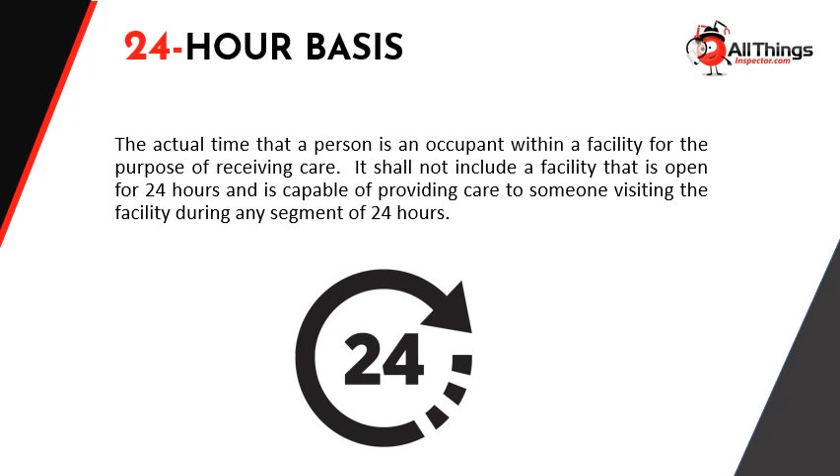24-hour basis: the actual time that a person is an occupant within a facility for the purpose of receiving care. It shall not include a facility that is open for 24 hours and is capable of providing care to someone visiting the facility during any segment of 24 hours.

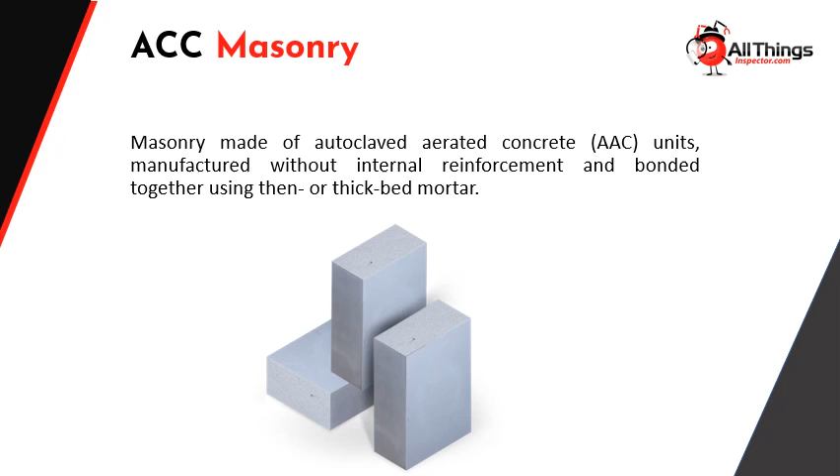ACC Masonry. Masonry made of autoclaved aerated concrete units, manufactured without internal reinforcement and bonded together using thin or thick bed mortar. Accessible. A site, building, facility, or portion thereof that complies with Chapter 11.

Accessible means of egress. A continuous and unobstructed way of egress travel from any accessible point in a building or facility to a public way.

Accessible unit. A dwelling unit or sleeping unit that complies with this code and the provisions for accessible units in ICC A117.1.

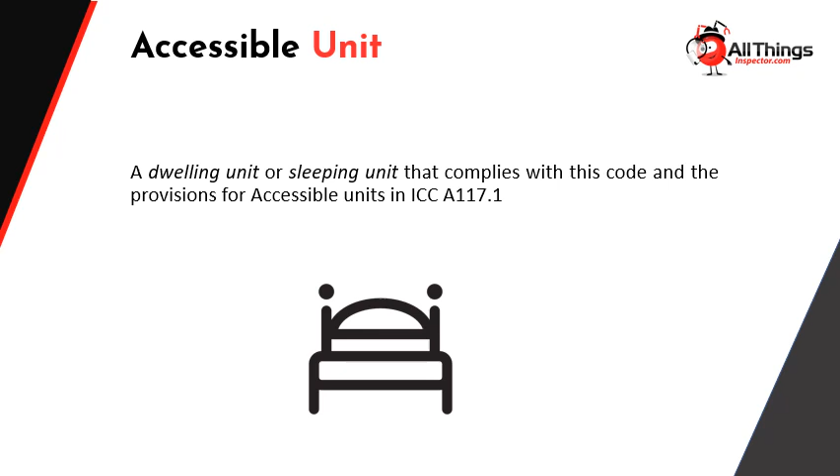Accreditation Body. An approved third-party organization that is independent of the grading and inspection agencies and the lumber mills, and that initially accredits and subsequently monitors on a continuing basis the competency and performance of a grading or inspection agency related to carrying out specific tasks.

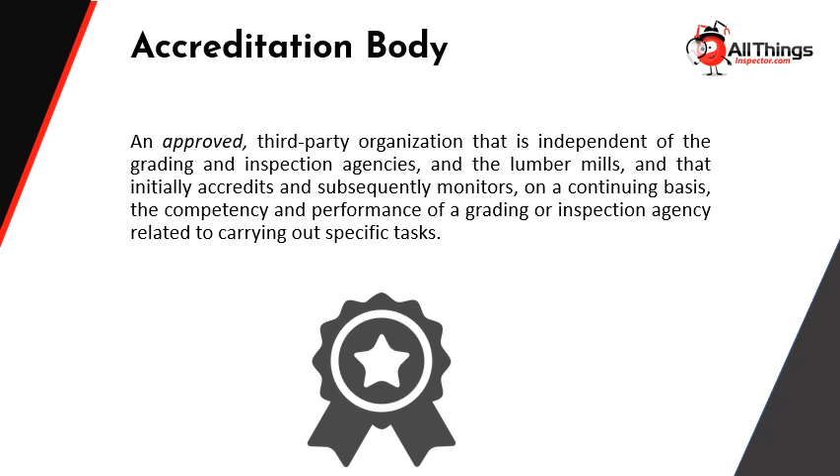Addition. An extension or increase in floor or height of a building or structure.

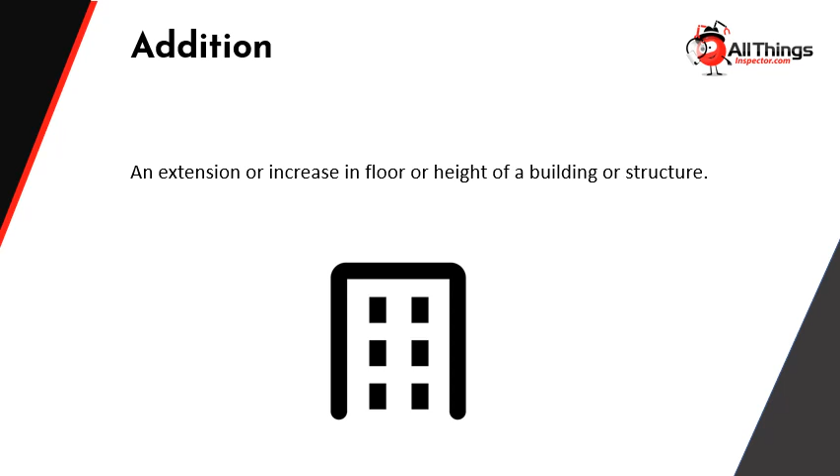Adhered masonry veneer. Veneer secured and supported through the adhesion of an approved bonding material applied to an approved backing.

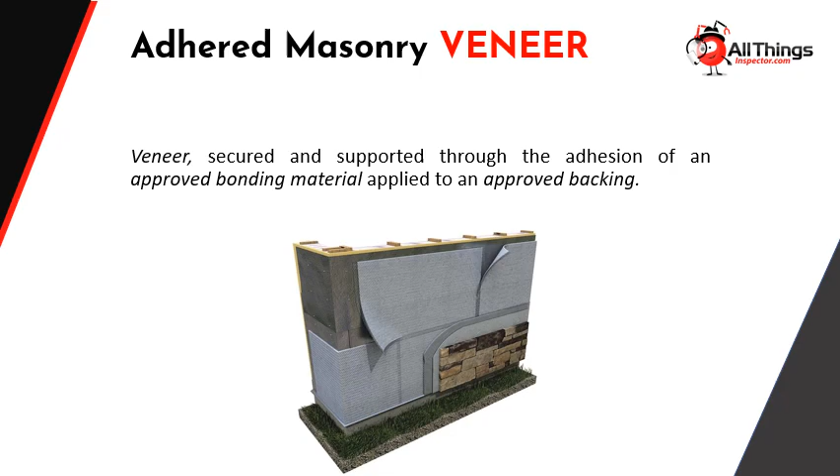Adobe Construction. Construction in which the exterior load-bearing and non-load-bearing walls and partitions are unfired clay masonry units, and floors, roofs, and interior framing are wholly or partly of wood or other approved materials.

Adobe Stabilized. Unfired clay masonry units to which admixtures such as emulsified asphalt are added during the manufacturing process to limit the unit's water absorption so as to increase their durability.

Adobe Unstabilized. Unfired clay masonry units that do not meet the definition of Adobe Stabilized.

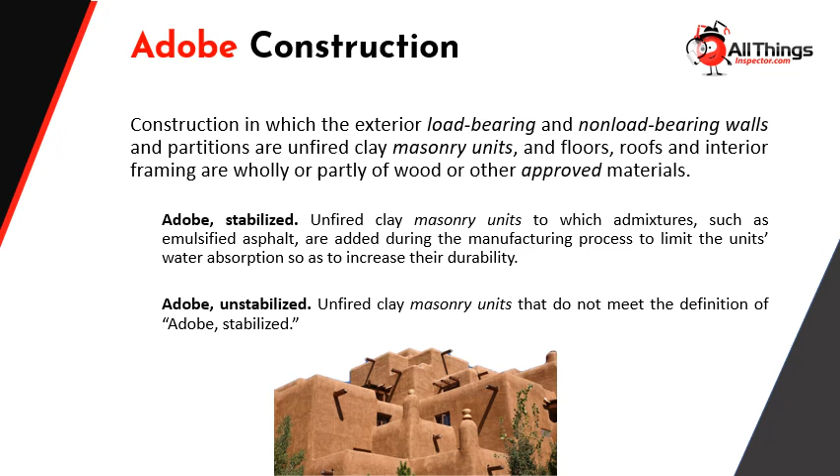Aerosol. A product that is dispensed from an aerosol container by a propellant. Aerosol products shall be classified by means of the calculation of their chemical heats of combustion and shall be designated Level 1, Level 2, or Level 3.

Level 1 aerosol products: those with a total chemical heat of combustion less than or equal to 8,600 British thermal units per pound. Level 2 aerosol products: those with a total chemical heat of combustion greater than 8,600 but less than or equal to 13,000 British thermal units per pound. Level 3 aerosol products: those with a total chemical heat of combustion greater than 13,000 British thermal units per pound.

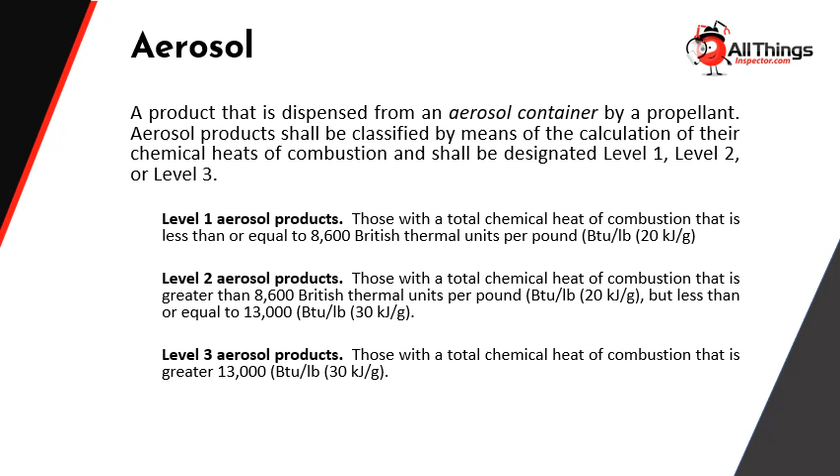Aerosol Container. A metal can, or glass or plastic bottle, designed to dispense an aerosol.

Aggregate. In roofing, crushed stone, crushed slag, or water-worn gravel used for surfacing for roof coverings.

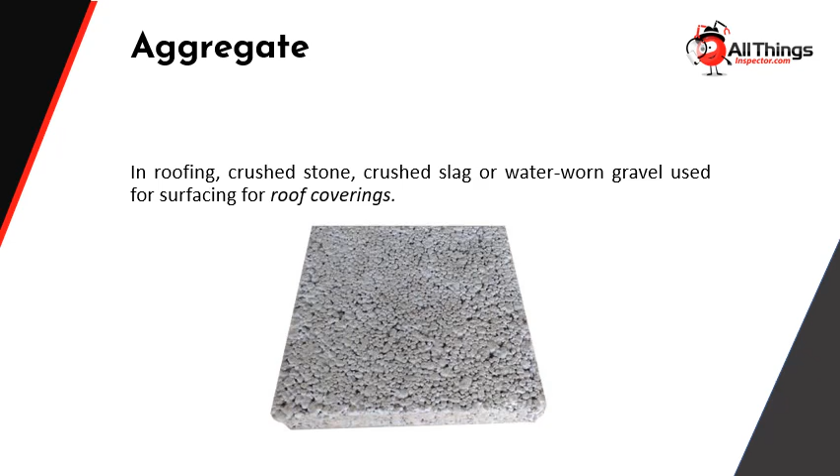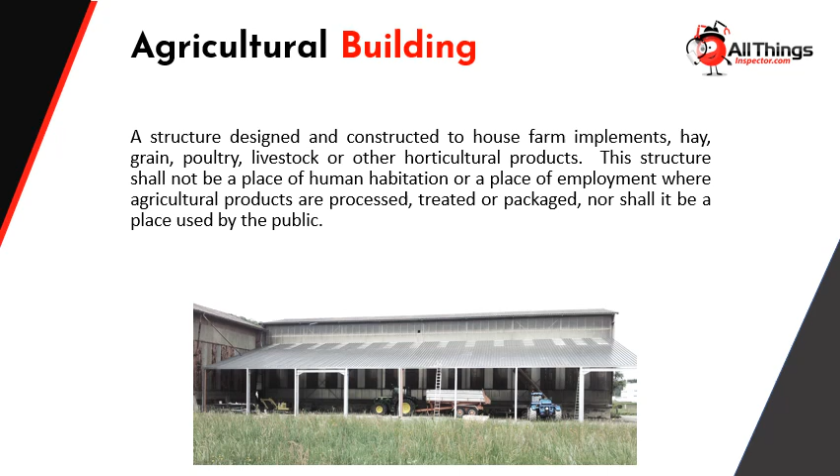Agricultural building. A structure designed and constructed to house farm implements, hay, grain, poultry, livestock, or other horticultural products. This structure shall not be a place of human habitation or a place of employment where agricultural products are processed, treated, or packaged, nor shall it be a place used by the public.

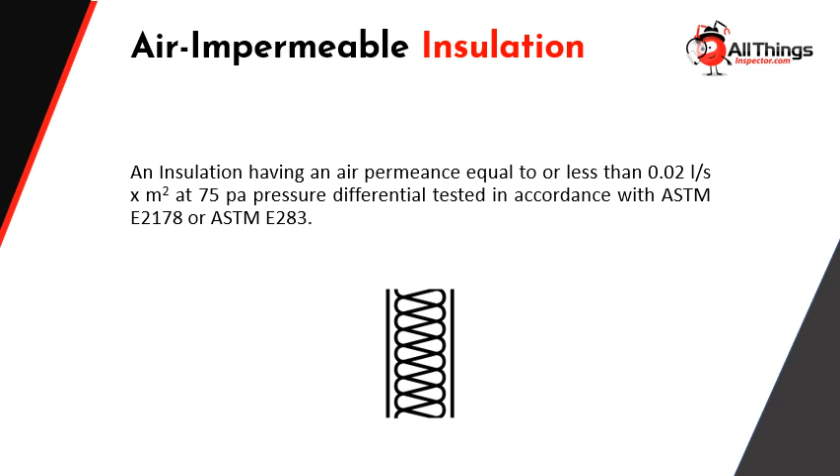Air-Impermeable Insulation. Insulation having an air permeance equal to or less than 0.02 L/S times M squared at 75 PA pressure differential, tested in accordance with ASTM E2178 or ASTM E283.

Air-inflated structure. A structure that uses air pressurized membrane beams, arches, or other elements to enclose space. Occupants of such a structure do not occupy the pressurized air used to support the structure.

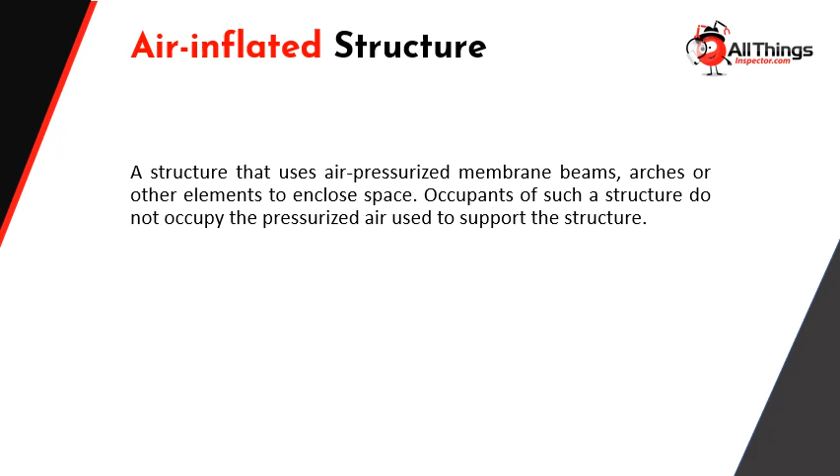Air-supported structure: a structure wherein the shape of the structure is attained by air pressure and occupants of the structure are within the elevated pressure area. Air-supported structures are of two basic types. Double skin, similar to single skin, but with an attached liner that is separated from the outer skin and provides an airspace which serves for insulation, acoustic, aesthetic, or similar purposes. Single skin, where there is only the single outer skin and the air pressure is directly against that skin.

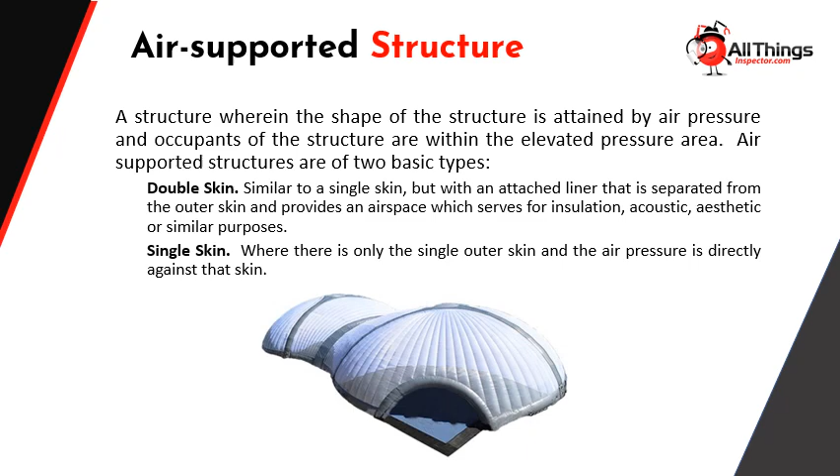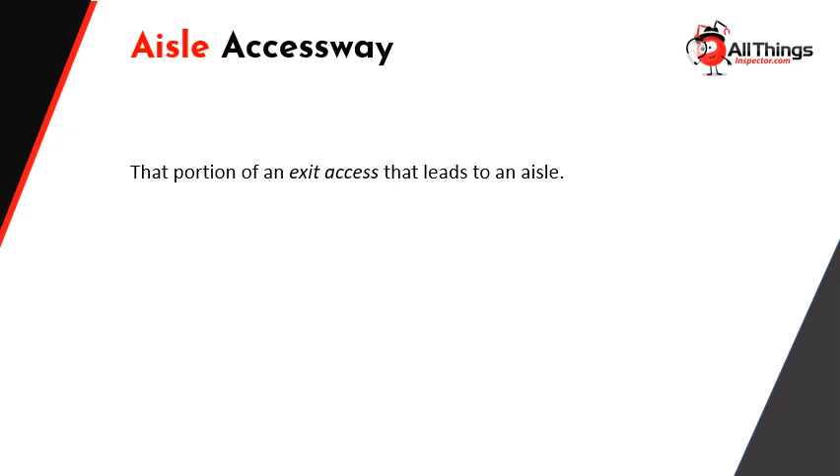Aisle: an unenclosed exit access component that defines and provides a path of egress travel. Aisle accessway: that portion of an exit access that leads to an aisle.

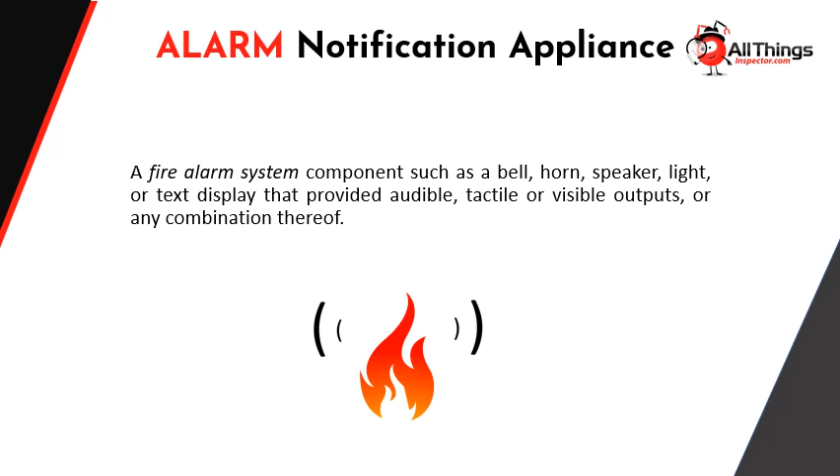Alarm notification appliance: a fire alarm system component such as a bell, horn, speaker, light, or text display that provides audible, tactile, or visible outputs, or any combination thereof.

Alarm signal: a signal indicating an emergency requiring immediate action, such as a signal indicative of a fire.

Alarm verification feature: a feature of automatic fire detection and alarm systems to reduce unwanted alarms wherein smoke detectors report alarm conditions for a minimum period of time, or confirm alarm conditions within a given period, after being automatically reset, in order to be accepted as a valid alarm initiation signal.

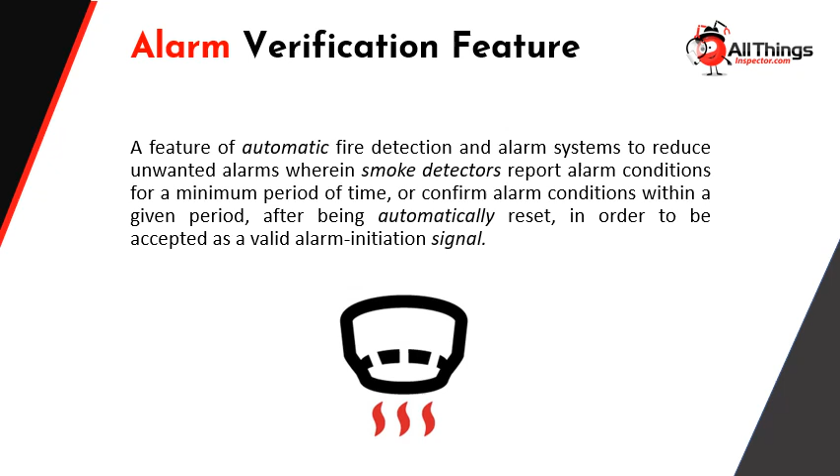Allowable stress design: a method of proportioning structural members such that elastically computed stresses produced in the members by nominal loads do not exceed specified allowable stresses, also called working stress design.

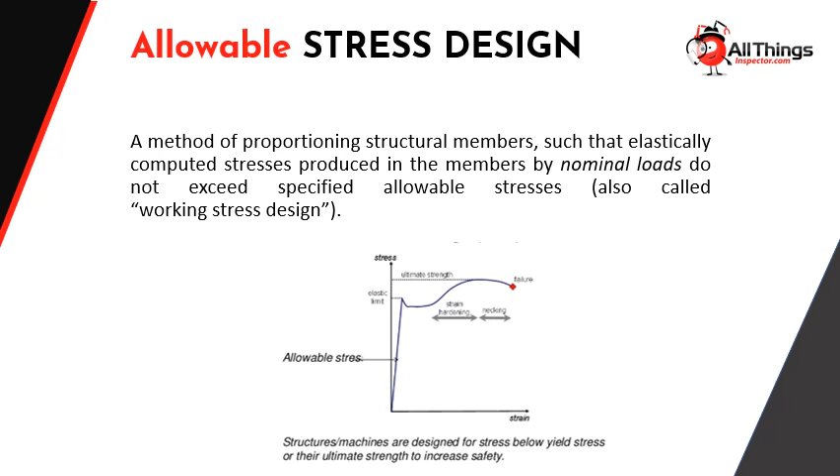Alteration: any construction or renovation to an existing structure other than repair or addition.

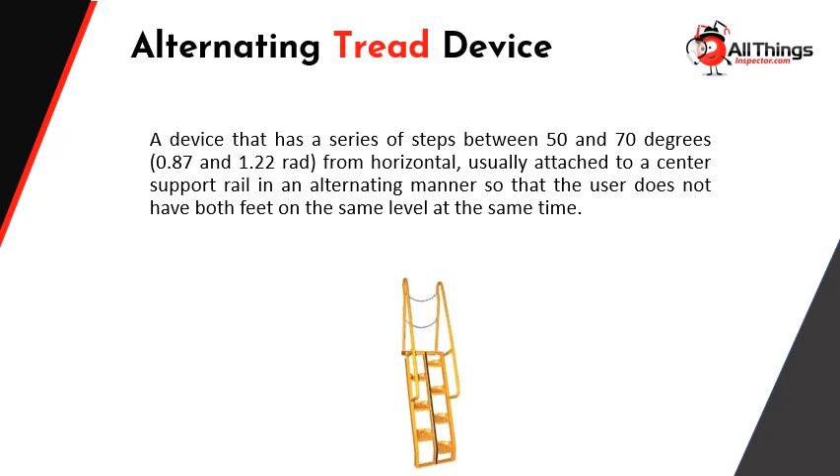Alternating tread device: a device that has a series of steps between 50 and 70 degrees, 0.87 and 1.22 radians from horizontal, usually attached to a center support rail in an alternating manner so that the user does not have both feet on the same level at the same time.

Ambulatory care facility: buildings or portions thereof used to provide medical, surgical, psychiatric, nursing, or similar care on a less than 24-hour basis to persons who are rendered incapable of self-preservation by the services provided.

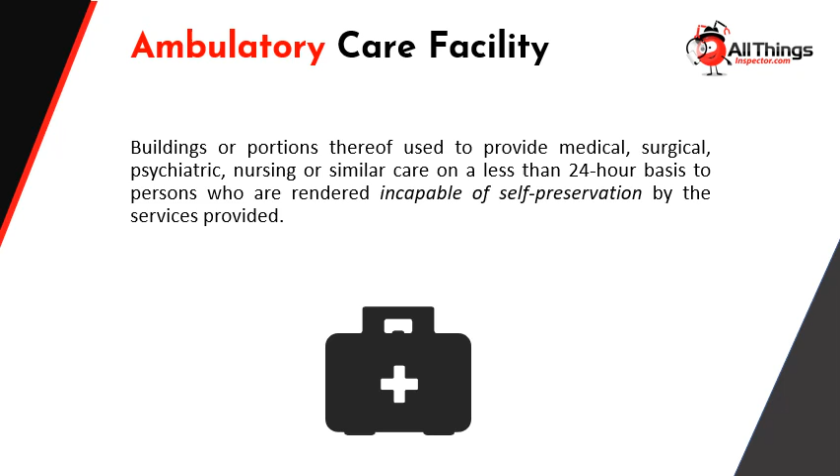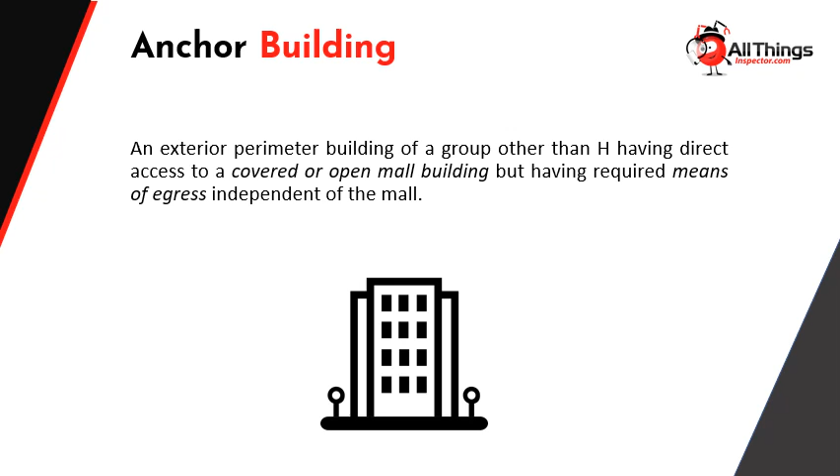Anchor building: an exterior perimeter building of a group other than H having direct access to covered or open mall buildings, but having required means of egress independent of the mall.

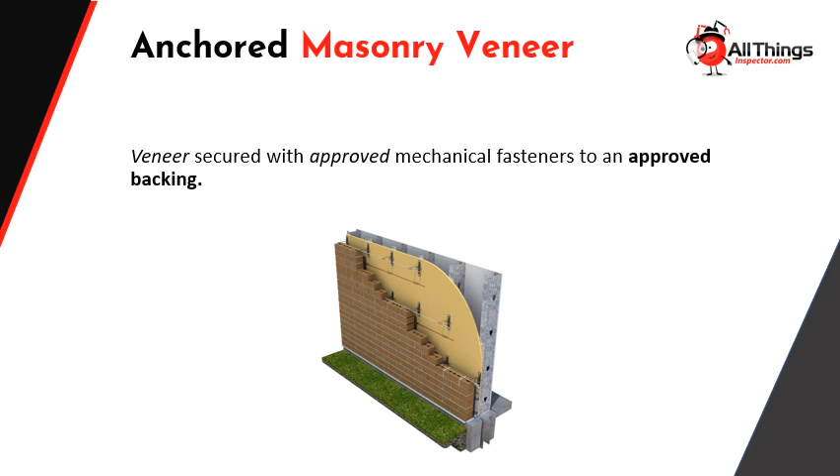Anchored masonry veneer: veneer secured with approved mechanical fasteners to an approved backing. Annular space: the opening around the penetrating item.

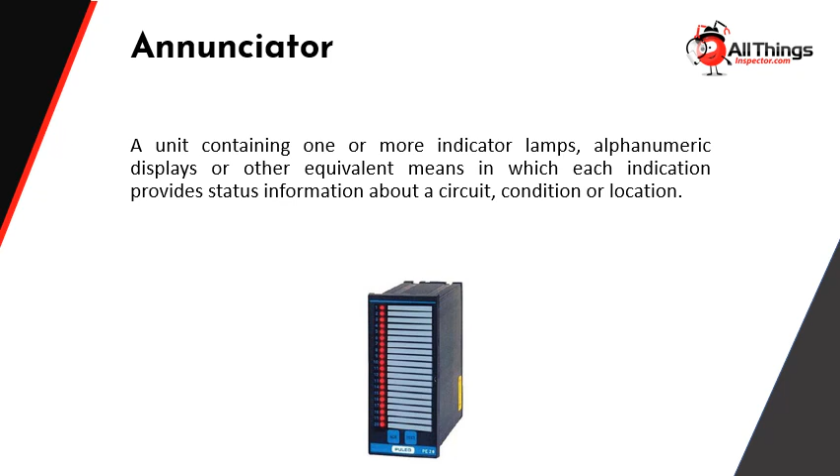Annunciator: a unit containing one or more indicator lamps, alphanumeric displays, or other equivalent means in which each indication provides status information about a circuit, condition, or location.

Approved: acceptable to the building official. Approved agency: an established and recognized agency that is regularly engaged in conducting tests or furnishing inspection services where such agency has been approved by the building official.

Approved fabricator: an established and recognized qualified person, firm, or corporation approved by the building official pursuant to Chapter 17 of this code. Approved source,

An independent person, firm, or corporation approved by the building official who is competent and experienced in the application of engineering principles to materials, methods, or system analysis.

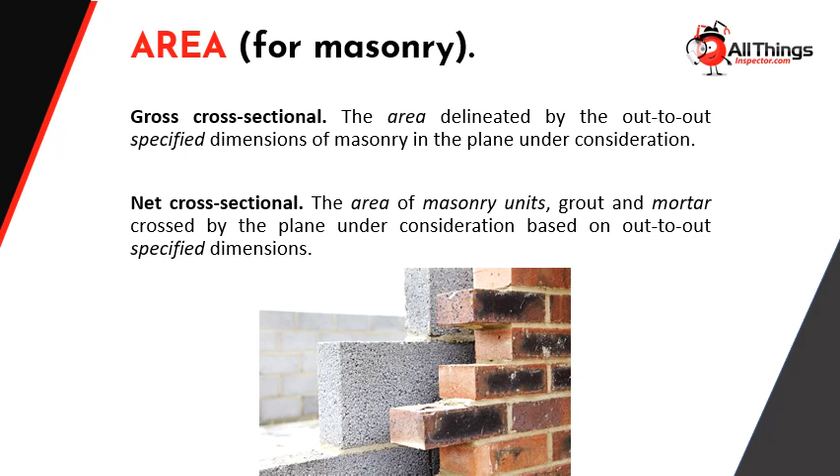Area for masonry, gross cross-sectional: the area delineated by the out-to-out specified dimensions of masonry in the plane under consideration. Net cross-sectional: the area of masonry units, grout, and mortar crossed by the plane under consideration based on out-to-out specified dimensions.

Building area: the area included within surrounding exterior walls, or exterior walls and firewalls, exclusive of vent shafts and courts. Areas of the building not provided with surrounding walls shall be included in the building area if such areas are included within the horizontal projection of the roof or floor above.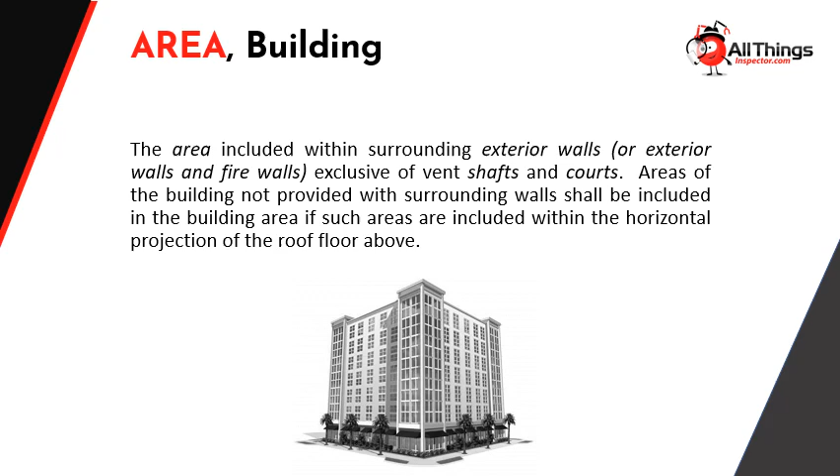Area of refuge: an area where persons unable to use stairways can remain temporarily to await instructions or assistance during emergency evacuation. Area of sports activity: that portion of an indoor or outdoor space where the play or practice of sports occurs.

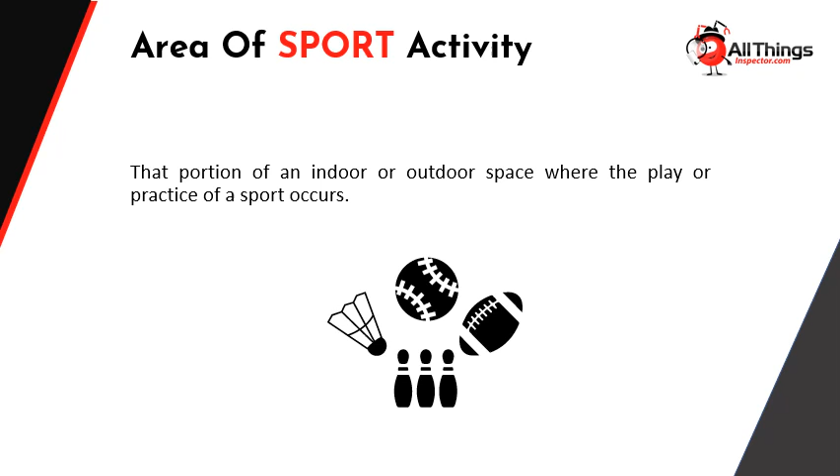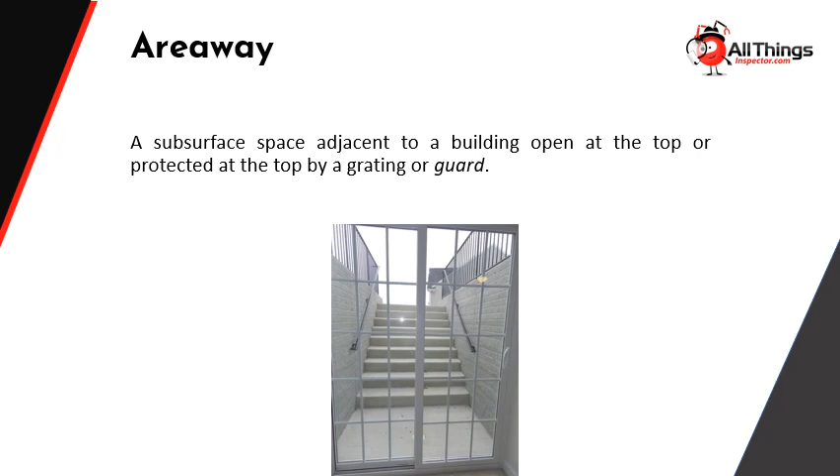Areaway: a subsurface space adjacent to a building, open at the top or protected at the top by a grating or a guard. Assembly seating, multi-level: see multi-level assembly seating.

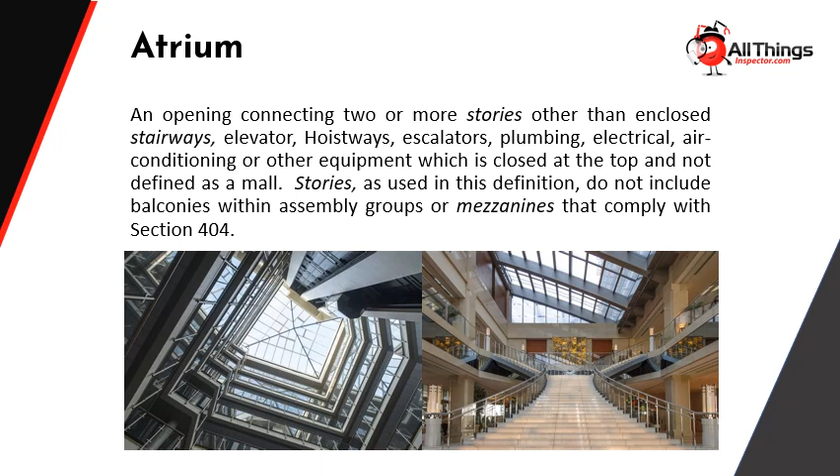Atrium: an opening connecting two or more stories other than enclosed stairways, elevator hoistways, escalators, plumbing, electrical, air conditioning, or other equipment, which is closed at the top and not defined as a mall. Stories, as used in this definition, do not include balconies within assembly groups or mezzanines that comply with Section 404. Attic: the space between the ceiling beams of the top story and the roof rafters.

Audible alarm notification appliance: a notification appliance that alerts by sense of hearing.

Autoclaved aerated concrete: a low density cementitious product of calcium silicate hydrates whose material specifications are defined in ASTM C1386.

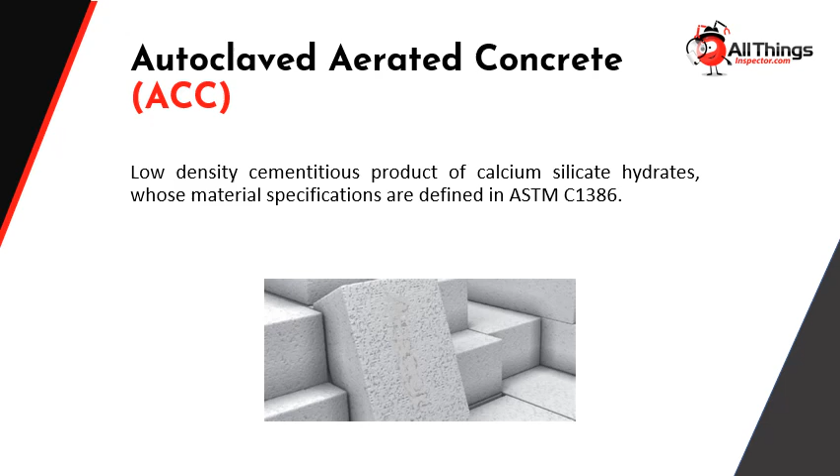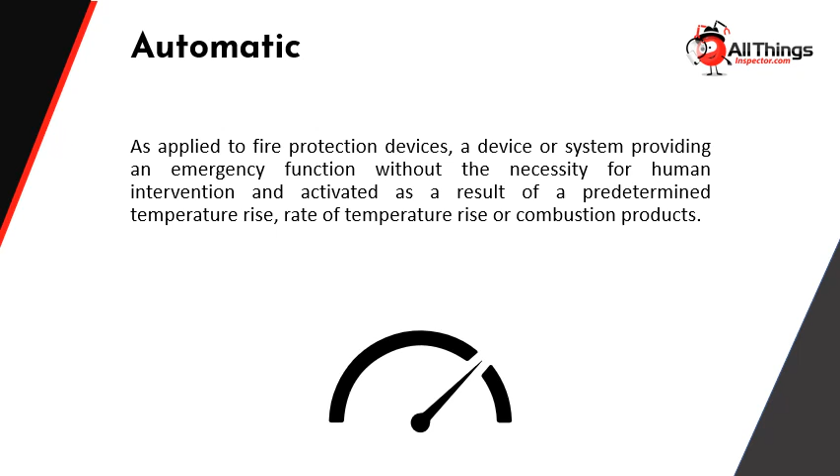Automatic, as applied to fire protection devices: a device or system providing an emergency function without the necessity for human intervention, activated as a result of a predetermined temperature rise, rate of temperature rise, or combustion products. Automatic fire-extinguishing system: an approved system of devices and equipment which automatically detects a fire and discharges an approved fire-extinguishing agent onto or in the area of a fire.

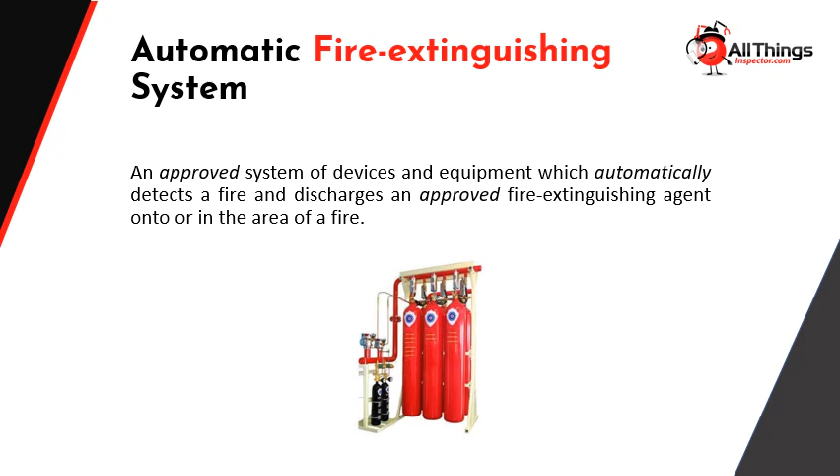Automatic smoke detection system: a fire alarm system that has initiation devices that utilize smoke detectors for protection of an area such as a room or space, with detectors to provide early warning of fire.

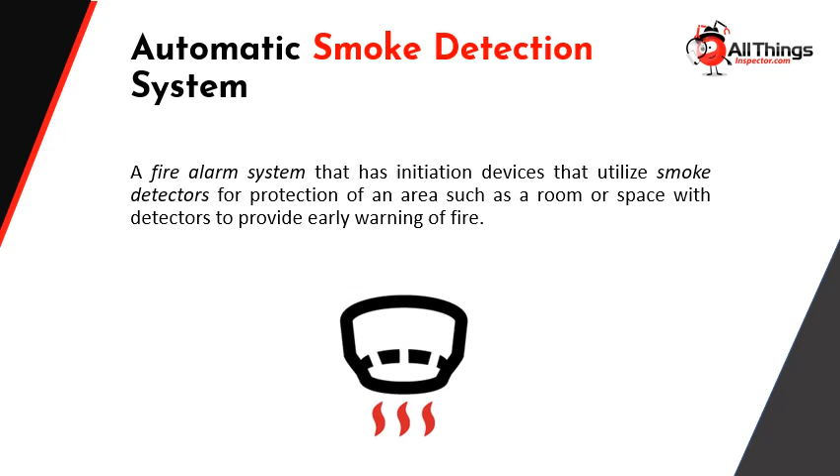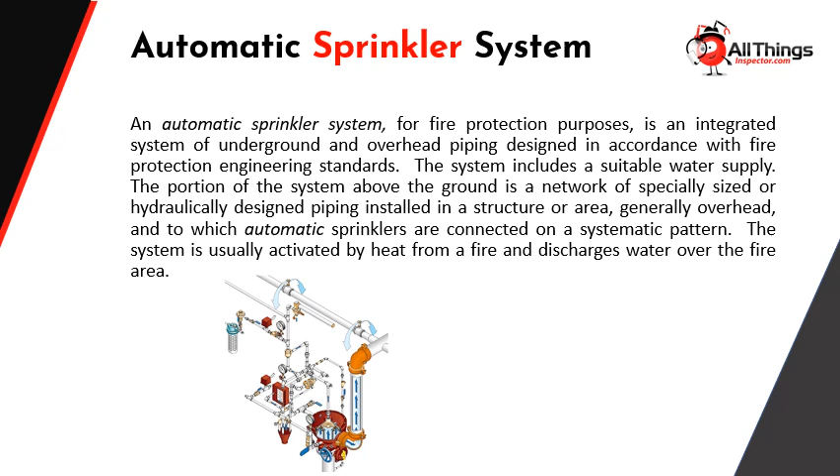Automatic sprinkler system: for fire protection purposes, an integrated system of underground and overhead piping designed in accordance with fire protection engineering standards. The system includes a suitable water supply. The portion of the system above the ground is a network of specially sized or hydraulically designed piping installed in a structure or area, generally overhead, to which automatic sprinklers are connected on a systematic pattern. The system is usually activated by heat from a fire and discharges water over the fire area.

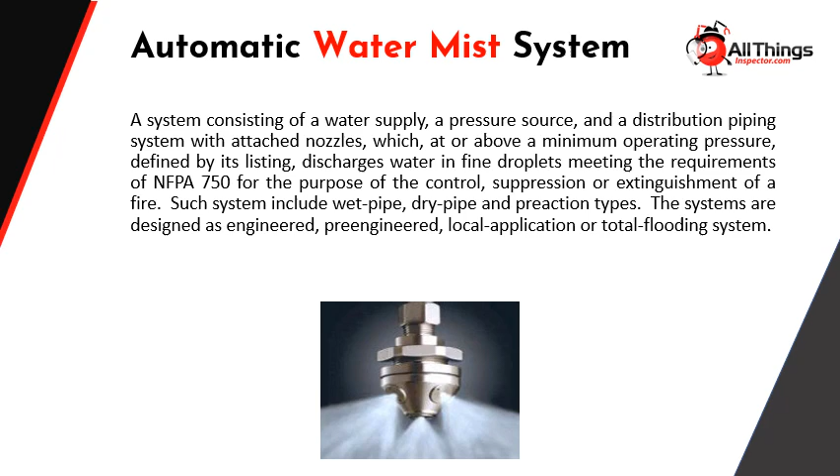Automatic water mist system: a system consisting of a water supply, a pressure source, and a distribution piping system with attached nozzles, which at or above a minimum operating pressure defined by its listing, discharges water in fine droplets meeting the requirements of NFPA 750 for the purpose of the control, suppression, or extinguishment of a fire. Such systems include wet pipe, dry pipe, and pre-action types, and are designed as engineered, pre-engineered, local application, or total flooding systems.

Average ambient sound level: the root mean square A-weighted sound pressure level measured over a 24-hour period, or the time any person is present, whichever time period is less.

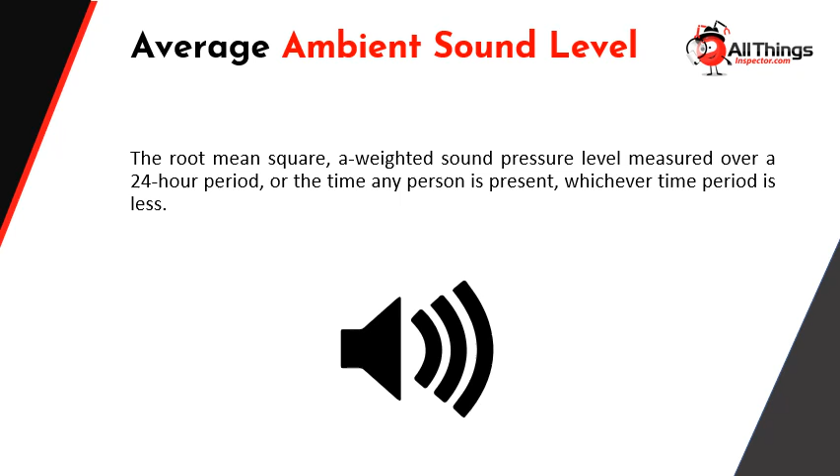Awning: an architectural projection that provides weather protection, identity, or decoration, and is partially or wholly supported by the building to which it is attached. An awning is comprised of a lightweight frame structure over which a covering is attached.

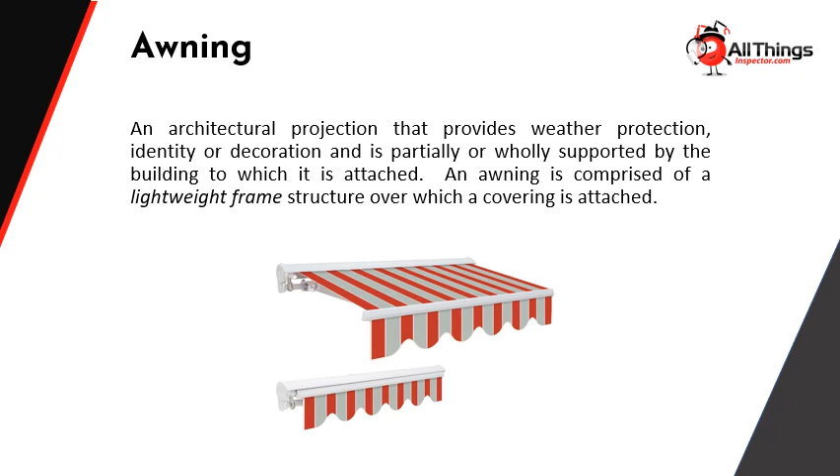Balanced door: a door equipped with double pivoted hardware so designed as to cause a semi-counterbalanced swing action when opening.

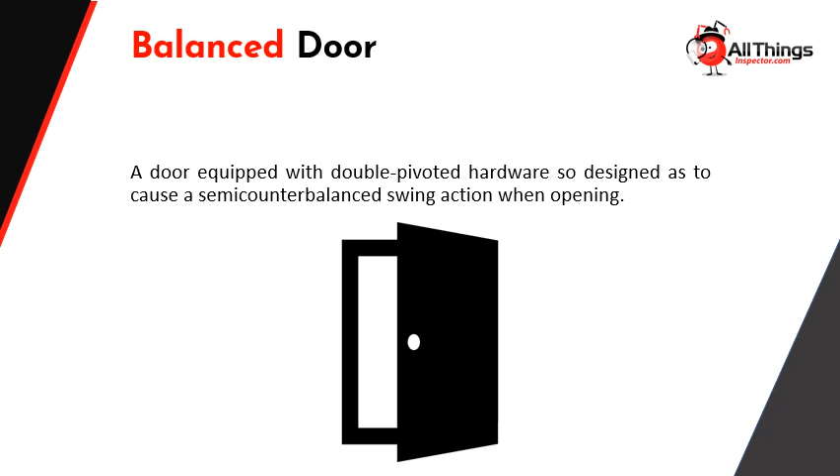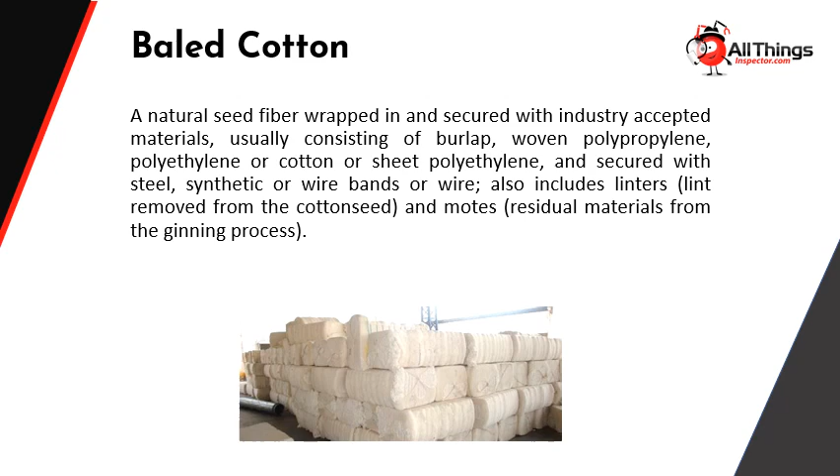Baled cotton: a natural seed fiber wrapped in and secured with industry-accepted materials, usually consisting of burlap, woven polypropylene, polyethylene, or cotton, or sheet polyethylene, and secured with steel, synthetic, or wire bands or wire. Also includes linters, lint removed from the cottonseed, and motes, residual materials from the ginning process.

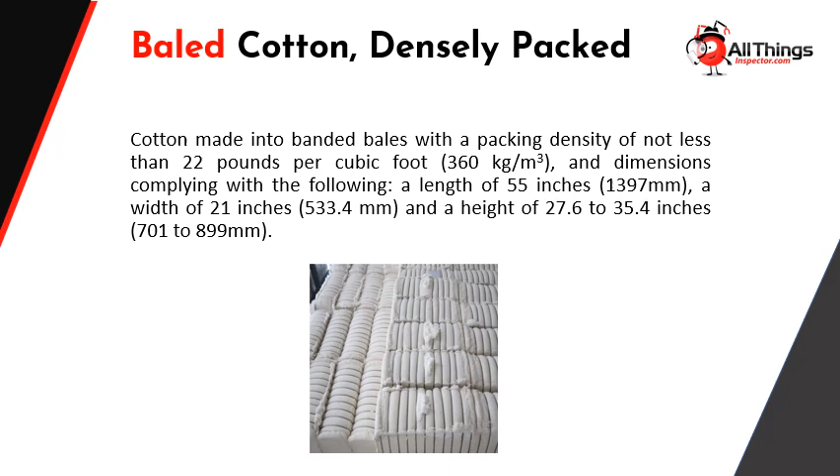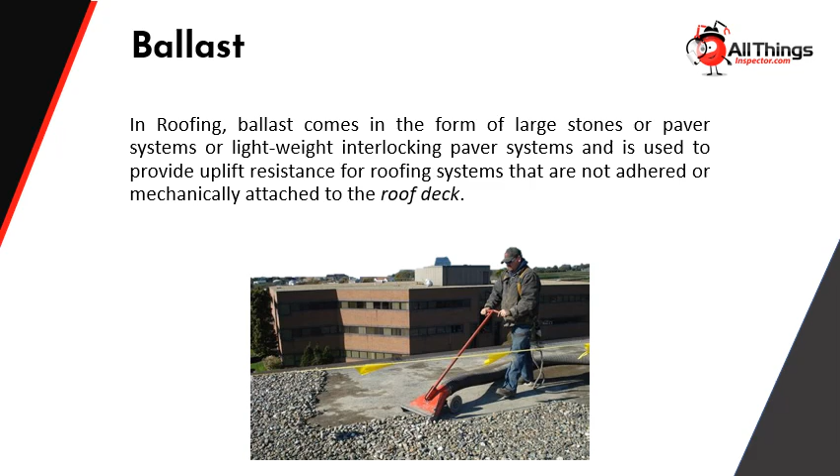Ballast: in roofing, ballast comes in the form of large stones, paver systems, or lightweight interlocking paver systems, and is used to provide uplift resistance for roofing systems that are not adhered or mechanically attached to the roof deck.

Barricade: a structure that consists of a combination of walls, floor, and roof, which is designed to withstand the rapid release of energy in an explosion, and which is fully confined, partially vented, fully vented, or other effective method of shielding from explosive materials by a natural or artificial barrier.

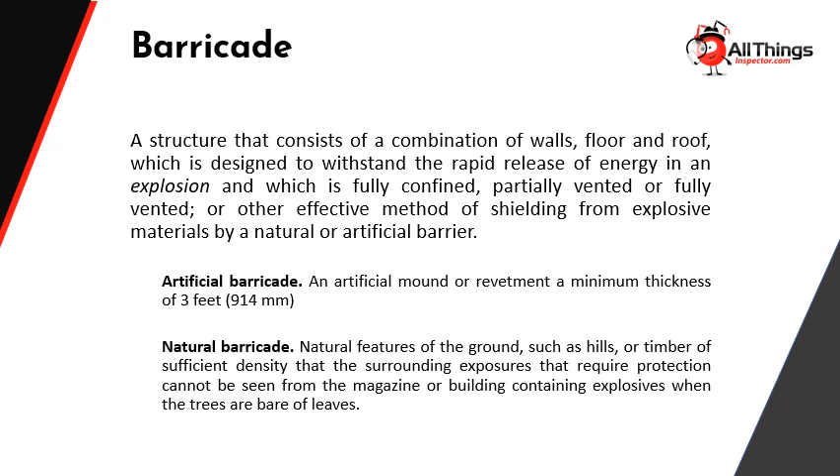Artificial barricade: an artificial mound or revetment of a minimum thickness of 3 feet. Natural barricade: natural features of the ground such as hills or timber of sufficient density that the surrounding exposures requiring protection cannot be seen from the magazine or building containing explosives when the trees are bare of leaves.

Base flood: the flood having a 1% chance of being equaled or exceeded in any given year.

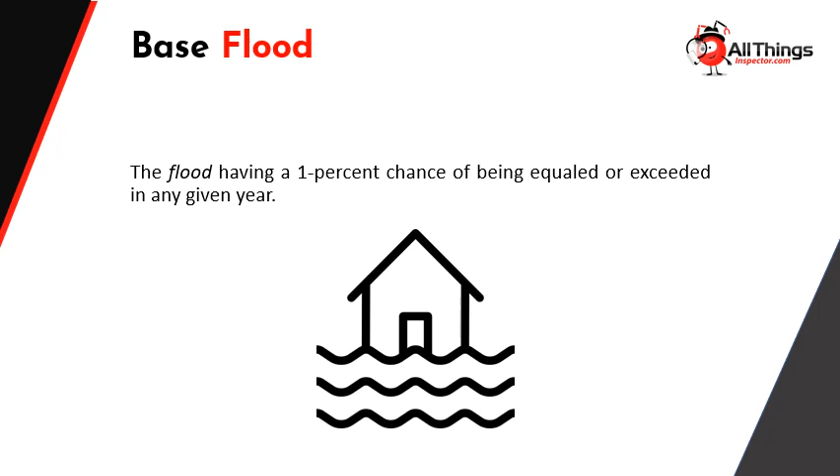Base flood elevation: the elevation of the base flood, including wave height, relative to the National Geodetic Vertical Datum, North American Vertical Datum, or other datum specified on the flood insurance rate map.

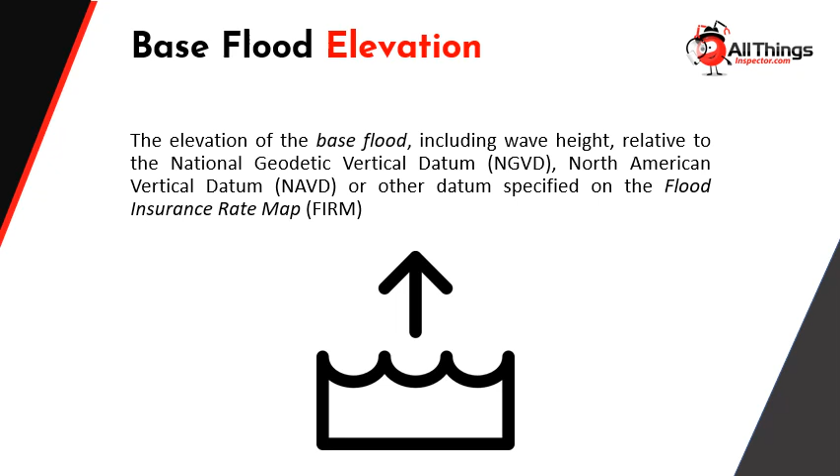Basement for flood loads: the portion of a building having its floor subgrade below ground level on all sides. The definition of basement is limited in application to the provisions of Section 1612.

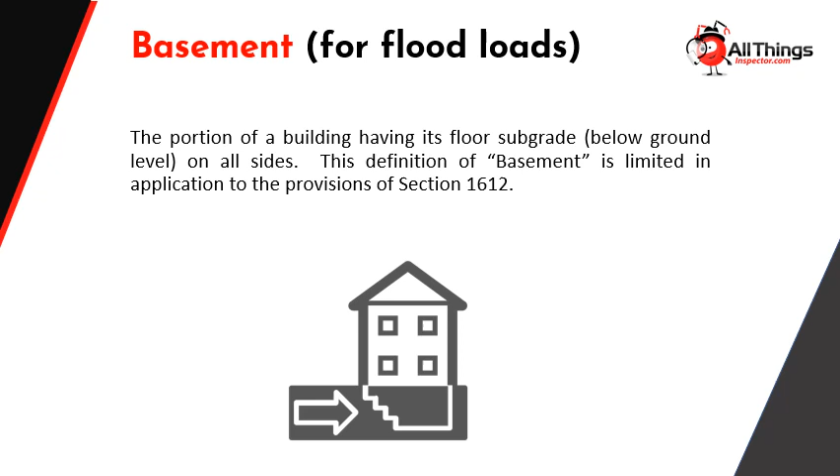Basement: a story that is not a story above grade plane. See story above grade plane. This definition of basement does not apply to the provisions of Section 1612 for flood loads.

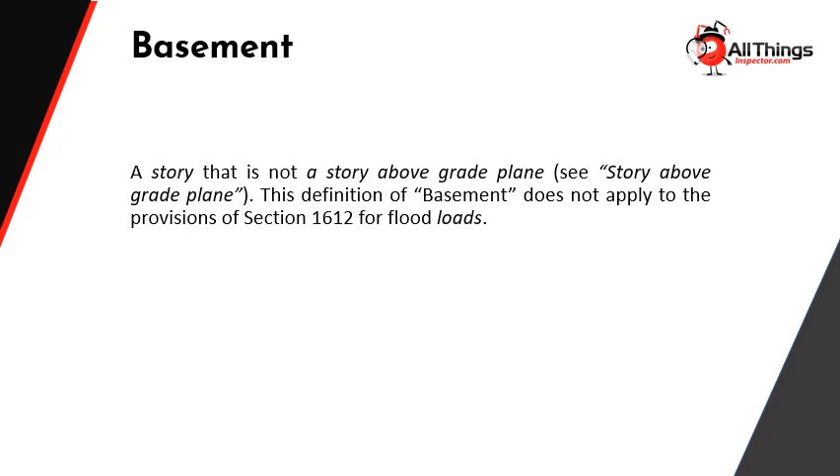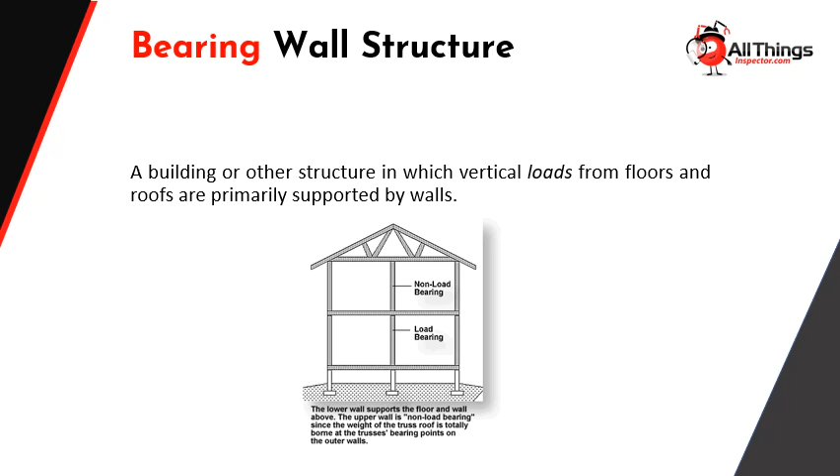Bearing wall structure: a building or other structure in which vertical loads from floors and roofs are primarily supported by walls. Bed joint: the horizontal layer of mortar on which a masonry unit is laid.

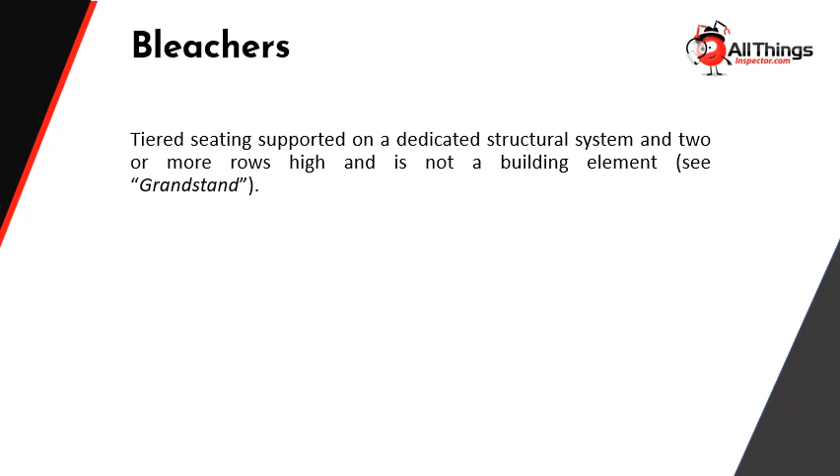Bleachers: tiered seating supported on a dedicated structural system, two or more rows high, and is not a building element. See grandstand. Boarding house: a building arranged or used for lodging for compensation, with or without meals.

Not occupied as a single family unit. Boiling point: the temperature at which the vapor pressure of a liquid equals the atmospheric pressure of 14.7 pounds per square inch, or 760 millimeters of mercury, where an accurate boiling point is unavailable for the material in question or for mixtures which do not have a constant boiling point.

For the purposes of this classification, the 20% evaporated point of a distillation performed in accordance with ASTM D86 shall be used as the boiling point of liquid.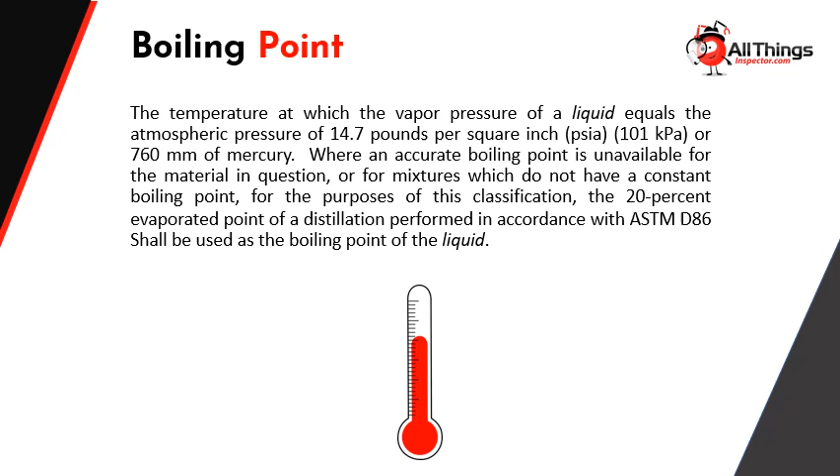Braced wall line: a straight line through the building plan that represents the location of the lateral resistance provided by the wall bracing. Braced wall panel: a full height section of wall constructed to resist in-plane shear loads through interaction of framing members, sheathing materials, and anchors.

The panel's length meets the requirements of its particular bracing method and contributes towards the total amount of bracing required along its braced wall line.

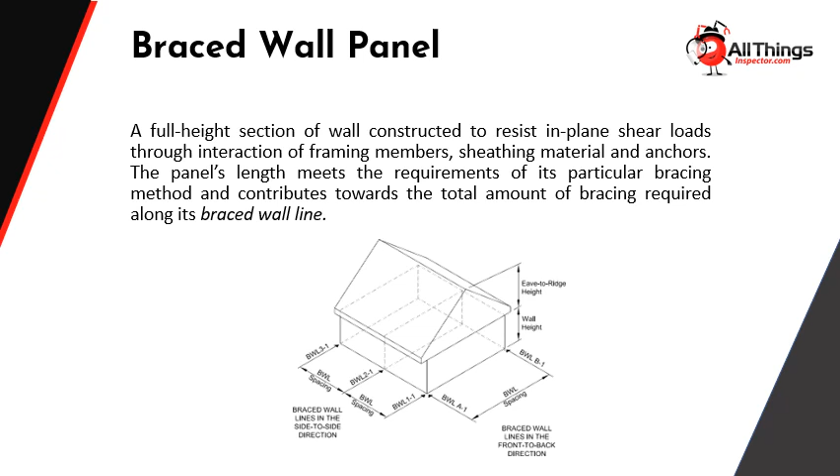Breakout, for revolving doors: a process whereby wings or door panels can be pushed open manually for means of egress travel. Brick, calcium silicate sand lime brick: a pressed and subsequently autoclaved unit that consists of sand and lime, with or without the inclusion of other materials.

Clay or shale brick: a solid or hollow masonry unit of clay or shale, usually formed into a rectangular prism, then burned or fired in a kiln.

Brick is a ceramic product. Concrete brick: a concrete masonry unit made from Portland cement, water, and suitable aggregates, with or without the inclusion of other materials.

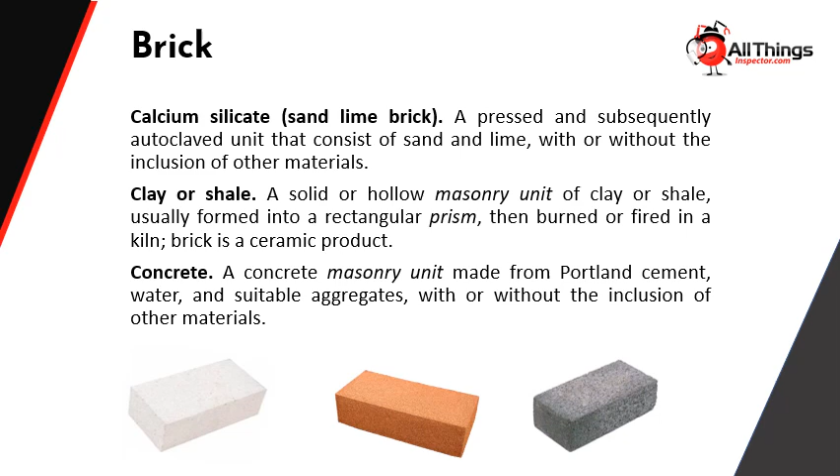Building: any structure used or intended for supporting or sheltering any use or occupancy. Building area: see area, building.

Building element: a fundamental component of building construction listed in Table 601, which may or may not be fire-resistance rated construction, and is constructed of materials based on the building type and construction.

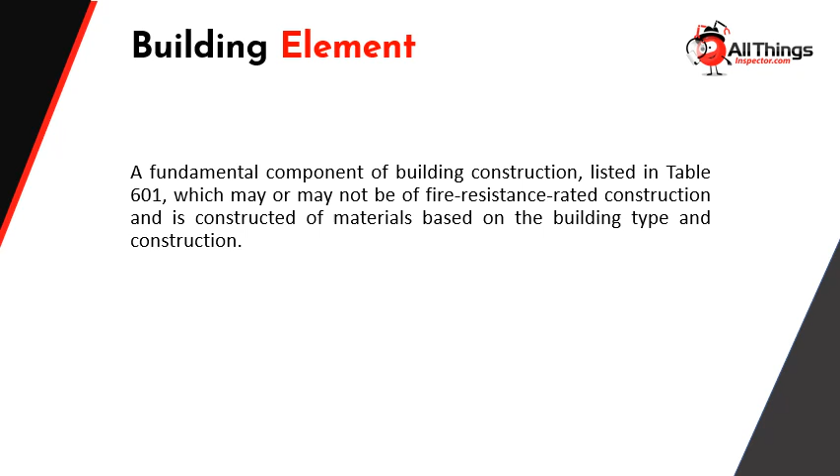Building height: see height, building. Building integrated photovoltaic product: a building product that incorporates photovoltaic modules and functions as a component of the building envelope.

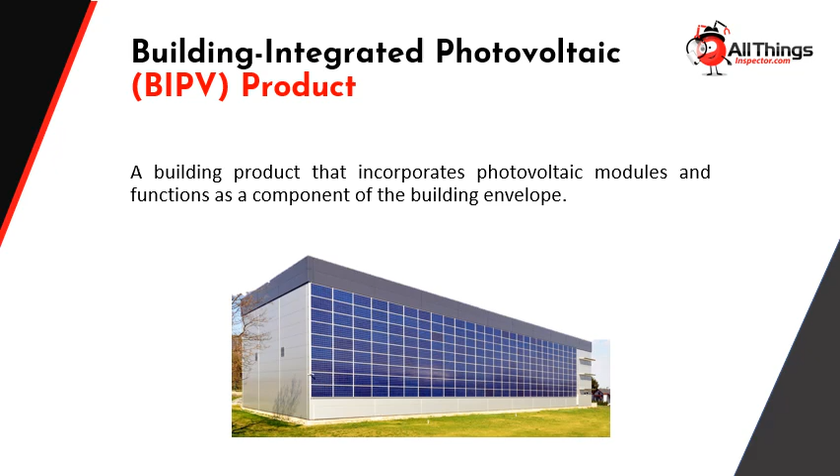Building official: the officer or other designated authority charged with the administration and enforcement of this code, or duly authorized representative.

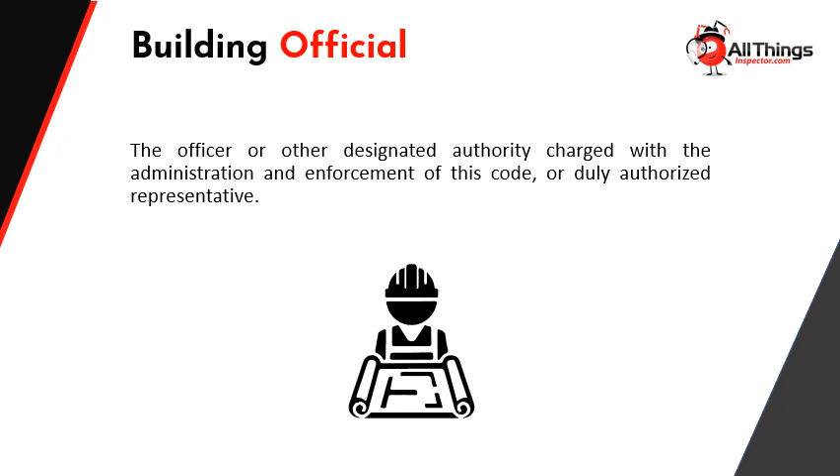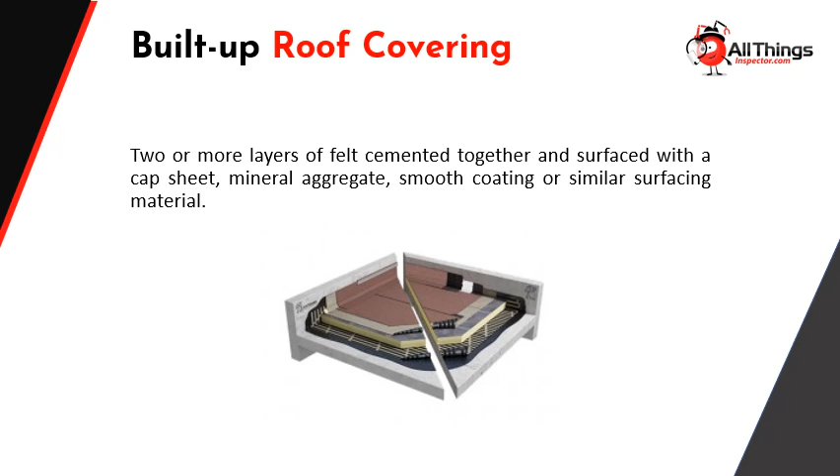Built-up roof covering: two or more layers of felt cemented together and surfaced with a cap sheet, mineral aggregate, smooth coating, or similar surfacing material.